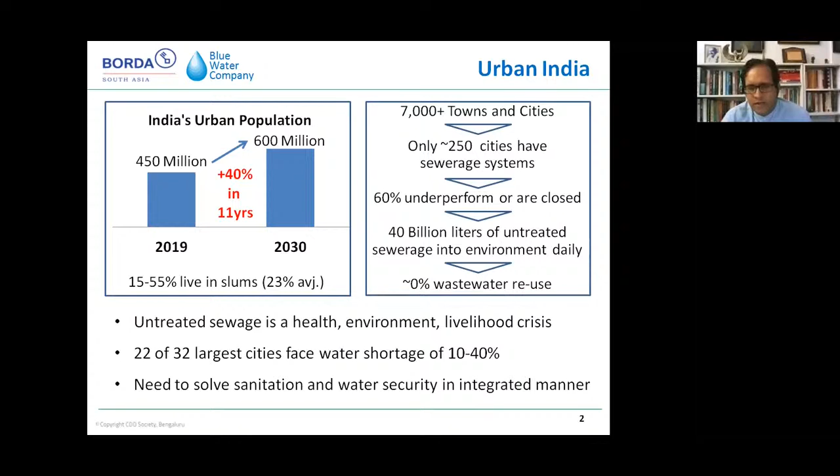So we need to look at sanitation and water in an integrated manner, and that's what we'll try and think about today.

A study done by FSG talked to people living in slums of India. The number one thing people wanted, 44%, was better toilets. This is from 2018-19, not pre-Swachh Bharat, but right in the middle of the Swachh Bharat mission, and still 44% wanted better household toilets. 36% wanted better water supply, 30% wanted drainage systems because flooding is a big problem, and others wanted garbage collection and improved water quality. So of the top 10 things people in slums want, 5 are directly water and sanitation related - that's pretty telling about the scale of the problem.

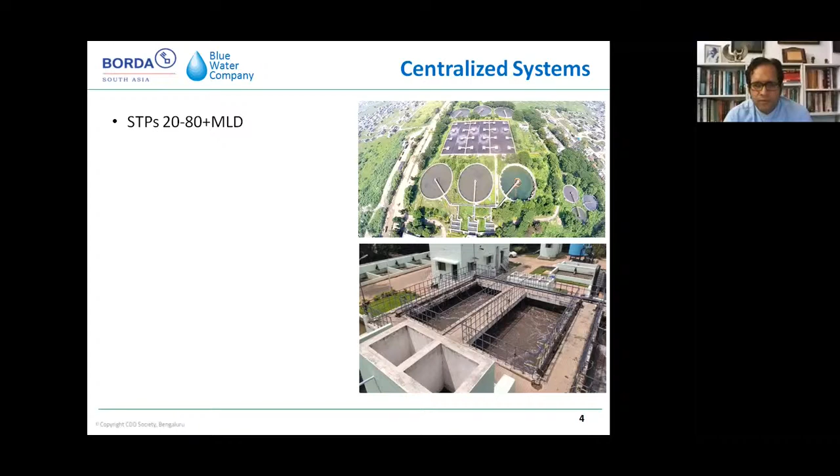Now let's start with centralized systems - the large sewage treatment plants and large sewer networks built in big cities. There are 250 cities in India with partial sewer networks. Typically sewage treatment plants range from 20 million liters a day to 80 million liters a day and more - the biggest under construction is in Nagpur, and Delhi is building one even bigger. The sewer networks that go under the road make up 90% of the total cost.

The sewage treatment plant itself is actually not the biggest cost - digging up roads and laying pipelines is very expensive, funded by the government through AMRUT, JICA, ADB, or other sources. It's expensive, and if it fails, there's a huge cost - both in money wasted, and because a 200 million liter a day plant means at that one point you'll have 200 million liters of sewage coming in with nothing that can be done about it. So you can imagine the large point pollution created in case of failure - the cost of failure is very high.

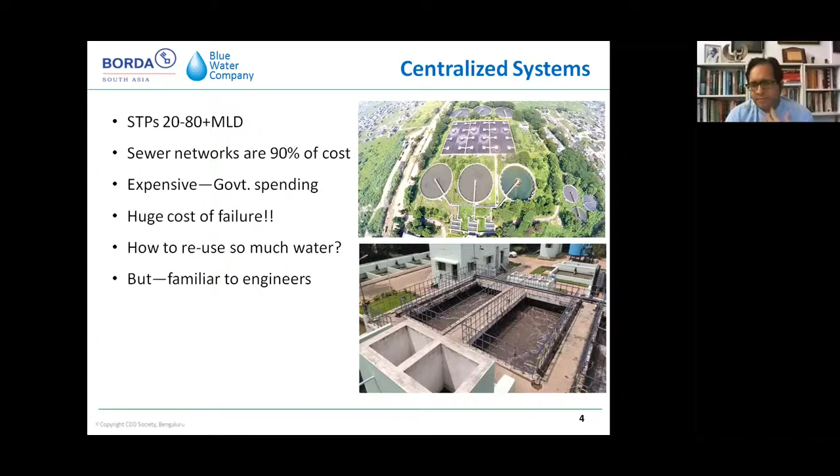How do you reuse so much water? You've taken this water to one place, now you have to pump the treated water to all these different places so it can be reused - so the process of reuse becomes very difficult because this is one big treatment plant in one location. But this is what engineers learn and are familiar with - there's history, so they're comfortable doing this even though there are clear shortcomings. There's a whole ecosystem around it - designers, engineers, quality assurance, operations and maintenance companies - so it's very easy in a sense, even if it's not the best solution at all times.

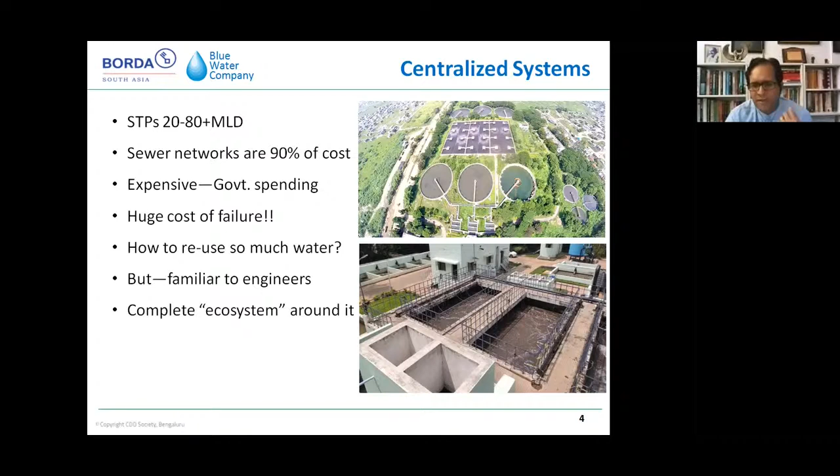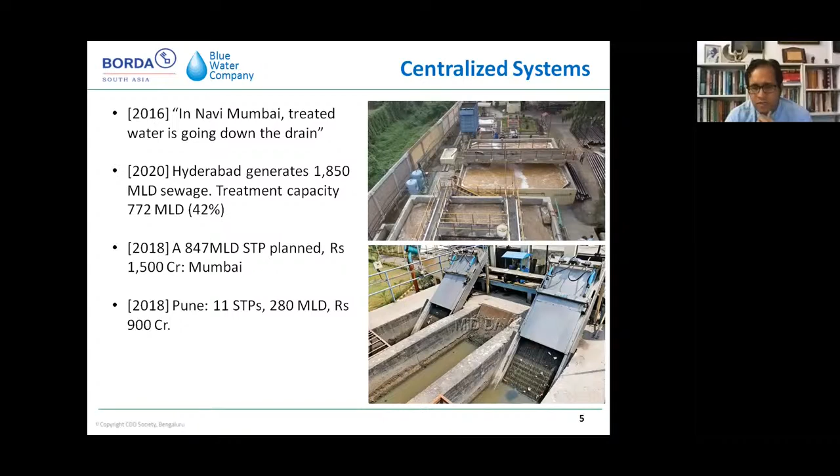A lot of money is being spent on this. For example, in Navi Mumbai, a 2016 newspaper article said treated water is going down the drain - that continues to happen today. Hyderabad generates 1,850 million liters a day of sewage with treatment capacity of only 772 MLD - the remaining 58%, over 1,000 million liters a day, goes into the river and lake untreated. Mumbai has planned an 847 MLD treatment plant costing 1,500 crores - a big project. Pune is building 11 STPs with 280 MLD capacity costing 900 crore rupees with a loan from JICA. And in 2017, Mumbai planned 6 more STPs costing 4,500 crores - another big project.

Just one more thing - for that 847 million liter a day sewage treatment plant in Bombay, new research shows Bombay's west coast of India faces higher and higher risk of massive storms and hurricanes. We've seen what happened in Louisiana, New York, and other parts of the world, and tsunamis that have hit. Imagine what happens if a tsunami hits this STP, which holds almost a billion liters of sewage, sitting right by the seafront.

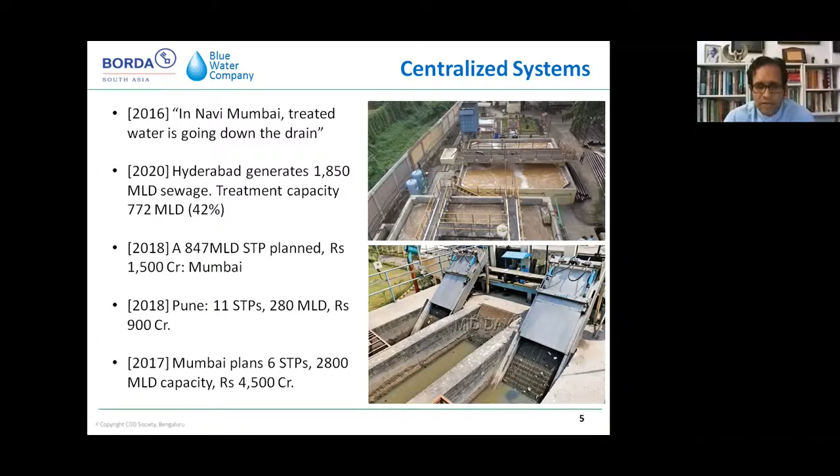You can imagine what kind of crisis you can have, right? So there's also, when I say there's a huge cost of failure, there's also a climate perspective. It will be around for the next 30 to 50 years. Mumbai is still using STPs which were set up almost 80 years ago.

Now let's look at the cost. If you look at centralized sewerage systems, it costs about 12,000 to 25,000 rupees per capita to build. So for a town of 1 lakh people, it will be 250 crores to build the sewer network and the STP. The annual operating cost will run at 2,000 to 4,000 rupees per person.

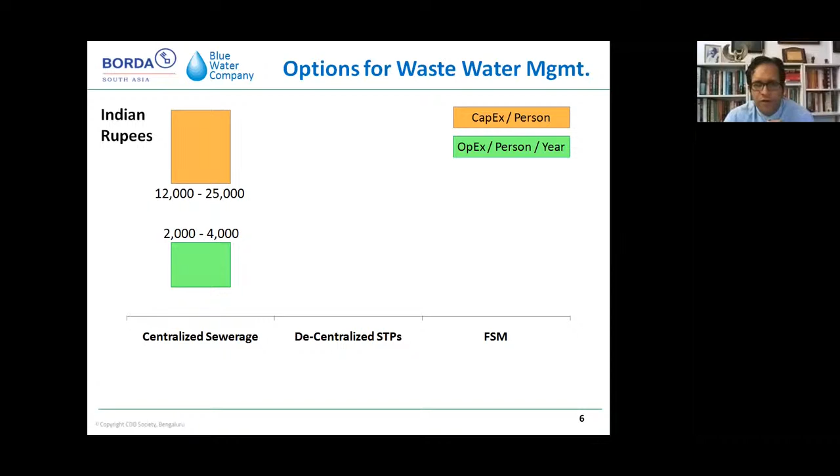Now we'll talk about decentralized systems, but I just want to give you a sense of magnitude. A decentralized system, depending on what technology you use, can cost you between 4,000 to 12,000 rupees per person to set up. So it's a bit cheaper, half the cost. And it costs very low, depending on the technology again, it can be very inexpensive to operate, 1,000 rupees per person per year. And then we talk about fecal sludge management, which is even more decentralized.

And that can be set up for as little as 400 to 1,000 rupees. Your operating cost is 60 to 100 rupees per person per year. Very, very affordable, and therefore it is getting a lot of traction today in India.

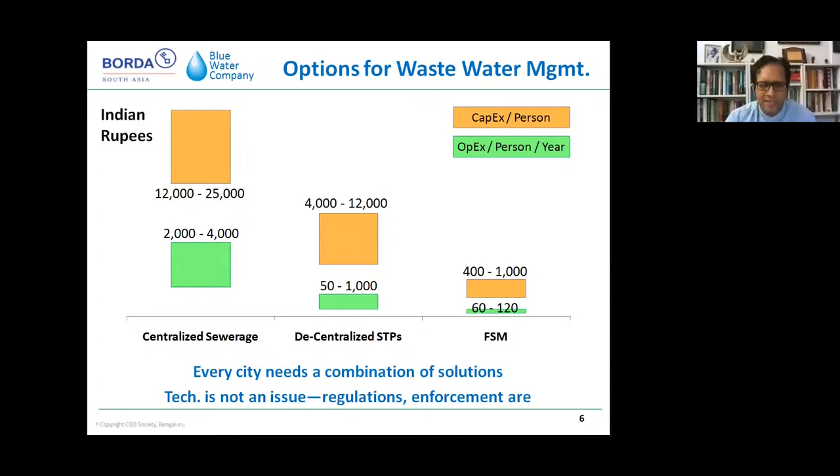Every big city requires a combination of these solutions. Even a small city might require a combination. Technology is not the issue. We have more than enough technology. It really is about planning, regulation, enforcement, etc., which are the problem in India today. There are enough countries we can learn from. There's enough successful studies, cases in India itself for us to replicate.

Decentralized sewage treatment plants - this is where you have a small STP, typically ranging from 40,000 liters to maybe 1 or 2 million liters a day. We're not talking 100 and 500 million liters a day. So they're small scale sewage treatment plants.

They're ideal for bulk users of water. What's a bulk user? Any building that uses a lot - a large apartment building, a large commercial building, educational campus, a hospital, a mall, which uses, let's say, 40-50,000 liters. It's usually not a small household or a building with 10 apartments, right? It will just be very expensive on a per capita basis. But for large buildings and campuses, very, very affordable, a great solution.

There are various different costs and different quality of treatment, and I'll talk to you a little bit about that later. So you've got very simple, durable workhorses. The most common technology - you've got the moving bed reactor, you've got the sequential batch reactor, you've got packaged MBBR system, which come in a container. You just literally put it into the hole or put it into the location, plug in the pipes, and we can install it in 2 days.

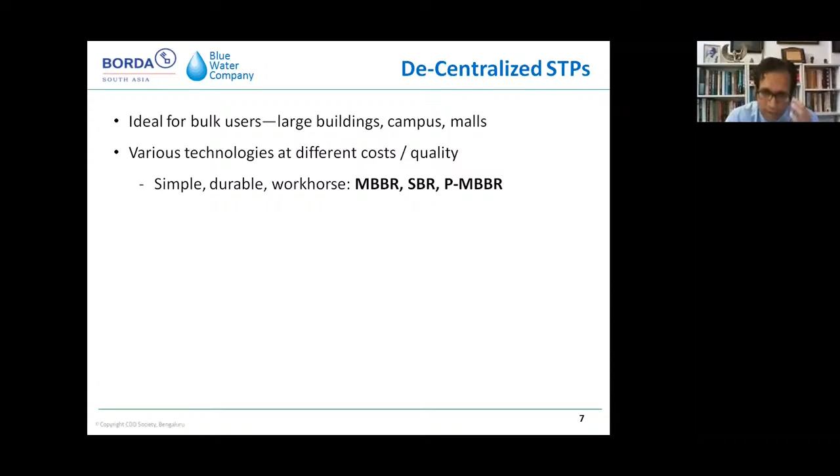You've got biological systems that require almost no electricity. They use nature-based solutions, and some of the options in India are soil biotechnology, DEWATS, Phytorid, etc. And then you've got very high-end systems which will take your sewage and make it into drinking water. This is the MBR technology, the most common. This is Singapore, which takes all its sewage and a lot of it is converted into drinking quality water. Although they don't supply it back for drinking, it's made into drinking quality water. There are 5-star hotels, there are office buildings in India which do this.

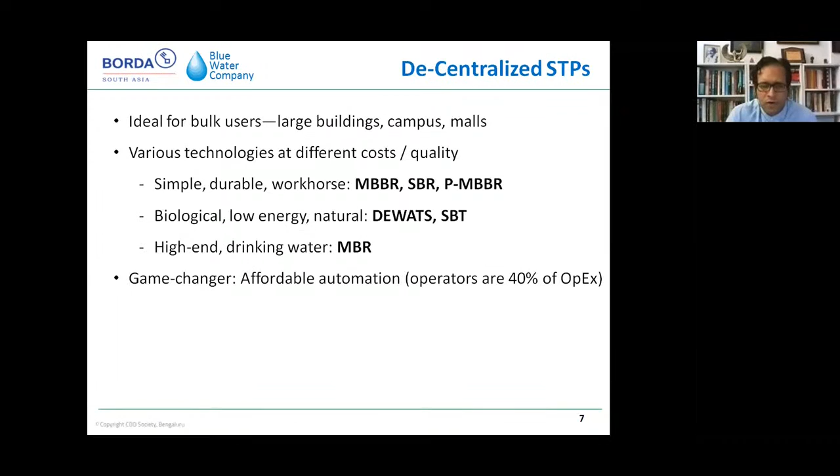So it's a very proven, established, but expensive technology. It takes a lot of energy. Automation in this business - because earlier you needed 24/7 manpower or people operating it, monitoring it, pressing a switch. Now a lot of this can be automated with internet, and therefore you can cut out your operator cost significantly, and the whole system becomes much more affordable than, let's say, even 2-3 years ago or 5 years ago.

Now, if the water within your building or your campus - you need dual piping, which means you have a fresh water tank that comes into, let's say, a bathroom, kitchen, etc. Then you have the pipe from there, which goes to the sewage treatment plant. The water that comes out of the STP is then taken to a separate water storage system, and then is supplied to those taps or those points which can use treated water - so for maybe air conditioning, central air conditioning, landscaping, definitely.

So then you have this dual piping system, and you can reduce your fresh water usage at a building by 40 to 60%. And imagine if you do this at a city scale, you've basically gotten rid of your water shortage problem. There'll be no day zero, there'll be no water stress.

We can address this with land, but we have to remember that 80% of our water in India is used by agriculture. Until agriculture becomes more efficient, it's very hard to make India more water secure. But at least our cities can start by taking care of their own water requirement.

The question that comes up is, what do you do with the excess water? When you're taking, let's say, 100 liters of water, that becomes 95 liters of wastewater. But for reuse purposes, you may need only 40 or 50 liters for flushing, gardening, landscaping. What do you do with that other 45 liters which you have treated? That needs to be either used or released into the environment safely. We'll talk about that.

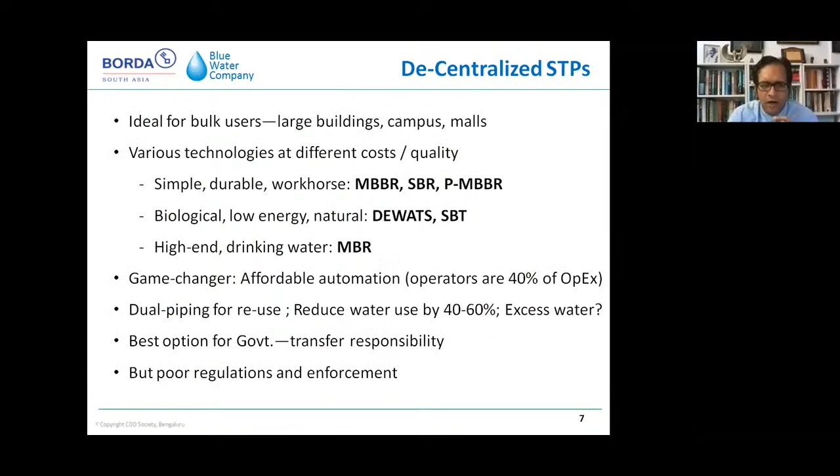This is the best solution for government. They transfer the responsibility to the private sector. It doesn't cost them anything. They only have to do the monitoring, the regulations and enforcement. And yet even that is not happening today because the regulatory enforcement is poor.

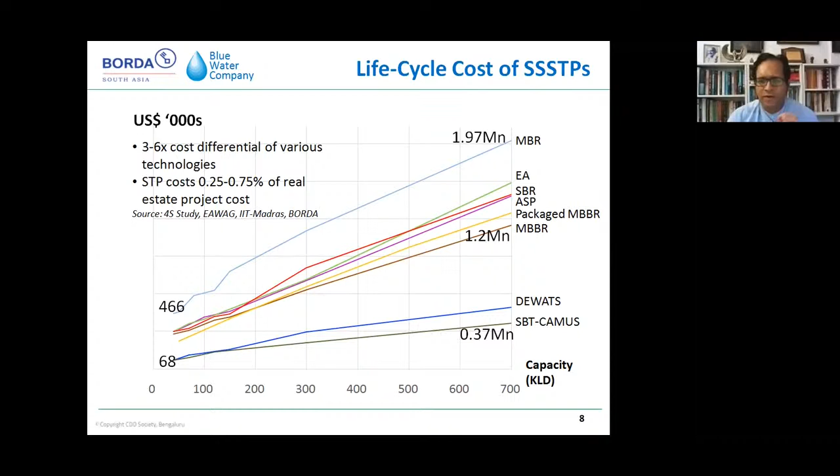Depending on your affordability and situation, the technology should meet the affordability of a particular customer. What we find is that if you look at a real estate project today, the STP cost will be less than 0.5% of the total real estate cost. So you can't even say it's too expensive for us to build STPs - that's not a good reason anymore. And the O&M costs are dropping every year, so it becomes more and more affordable, and really a matter of enforcement and people's responsibility to clean up our cities.

So what are some of the problems and solutions? Some of the discharge norms for small STPs are very strict, making the STP unaffordable because you can only use a very high-end STP. We need discharge norms depending on capacity. If you have a 200 million liter plant, you need it to reach certain standards, because having 200 million liters of even slightly polluted water entering the environment can be disastrous.

But if the same plant is doing 50,000 liters a day, and the water is slightly polluted, in environmental science we say you will get treatment through dilution - it will not be a crisis. Therefore, we should not be spending a lot of money on high-end, small-scale systems. Reuse requires that - if you want to reuse the water for bathing, yes, you need a high-end system. But in most cases we don't do that. We still use fresh water for human contact purposes.

So second is zero liquid discharge. Why can't I sell the treated water? Sell it to construction, to industry, for landscaping, to municipalities, instead of just forcing it to be recharged or released into the drain because of zero liquid discharge norms. Today, builders are often the ones who install low quality STPs because they don't have to pay for them - they install the STP, they get their occupation certificate, they sell the real estate, and they're out.

But then it's the residents who come in, who have to then pay for this poor quality STP because builders wanted to minimize their cost. As a result, you have very high O&M costs, and it becomes a headache for residents, and then at some point they stop using the system.

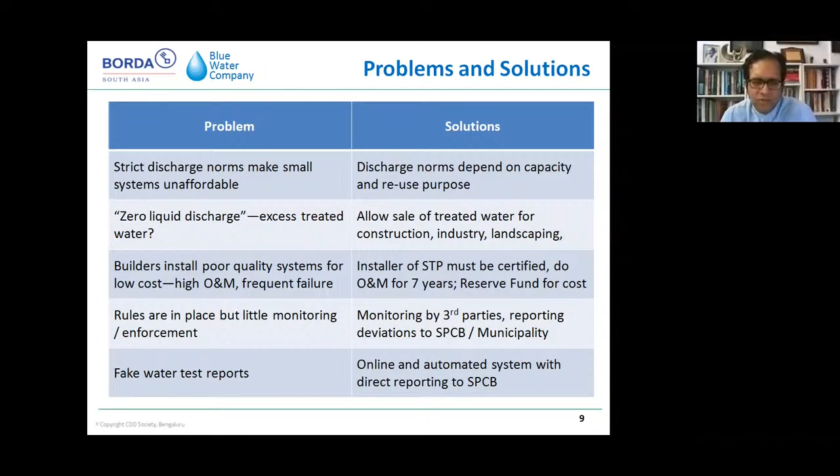Now let's talk about neighborhood level decentralization. Right now what we talked about is in a private complex, and that's easier because it's like in my building, it's common property, common ownership. But what happens when you go into the neighborhood, which is now public space, private - here we need a different approach.

It is still possible to have multiple small scale STPs around town. So in a city like Bombay, instead of doing, let's say, 20 STPs for a big city, you might want to do 300 small STPs. But this has its own complications. You can use different technologies and construction form depending on where the STP is - customize it to neighboring conditions, future expectations of increase in use, environmental danger, flood plains, etc. So you have flexibility to choose different technologies.

But it raises a challenge. Our water departments are used to managing very few centers. They want to run 5 treatment plants for water, 10 treatment plants for STP. We don't have an institutional mechanism to oversee 300 locations or 100 locations. So it requires a new kind of administrative and operational approach to come in for our Jal boards, water nigams, and sewerage boards to be able to manage this kind of decentralized approach.

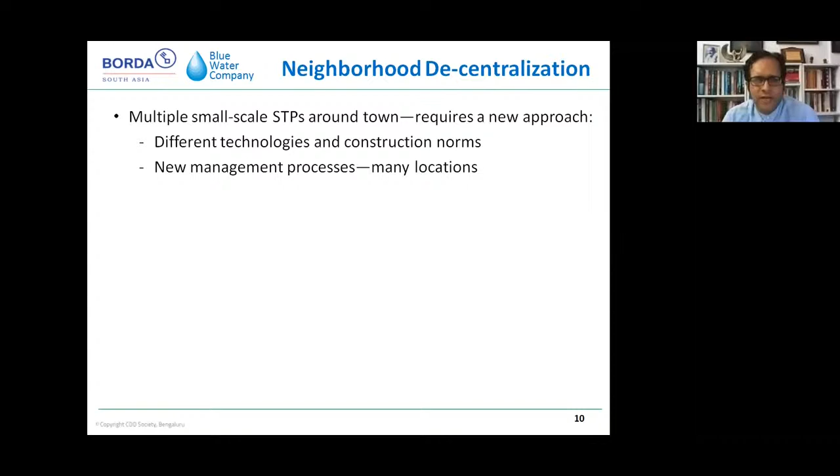Now, if you look at the overall cost of this different sewer system - you've got feeder networks, trunk networks, pumping stations, and STP. All in all, the decentralized approach might actually be similar in cost to your centralized one, because you'll have a higher cost for more small STPs, but you'll save money because the pipes will be smaller. So let's say your overall cost is similar.

Okay, so you say, well, there's no cost difference, I go for this, because there are other advantages. You can build by locality - you don't have to do the whole city in one go. There's money to do it here, or the conditions are suitable, let's do here, next year we'll do that. Today, a centralized system can take 12 years to build, and for 12 years you've dug the roads, people are frustrated, the pipes are there, and when you finally build the network, the pipes you built 12 years ago are breaking, they're cracked, and they're creating problems.

Whereas here you can literally go 2 years, one locality, and just keep building as you go. If some of the norms are changed - currently the norms are designed for big networks - if they're adapted for small networks, then you can actually reduce your costs quite significantly.

And then you can reuse the water locally. Remember, we had that problem - if you have 200 million liters of treated water in one location, how do you pump it back to all the users who might want to use it? Whereas here, if you've got 2 million, 3 million liters there, 5 million liters there, you can use it locally for gardening, for flushing, for public toilets, and so on - groundwater recharge, create water bodies, spaces, etc.

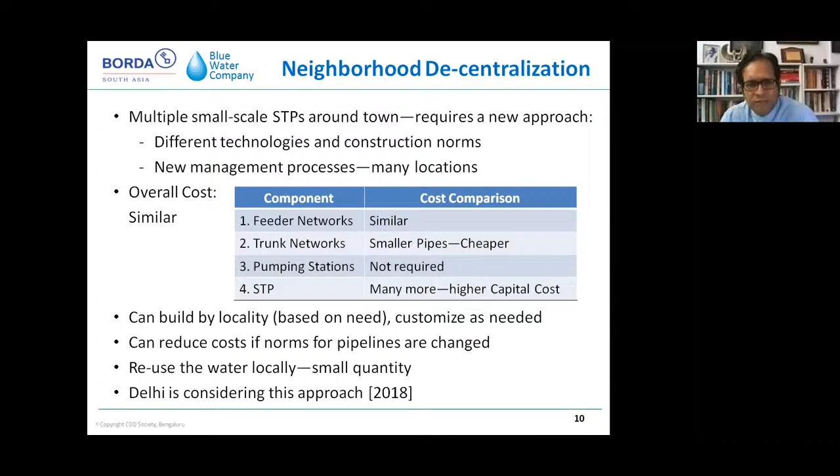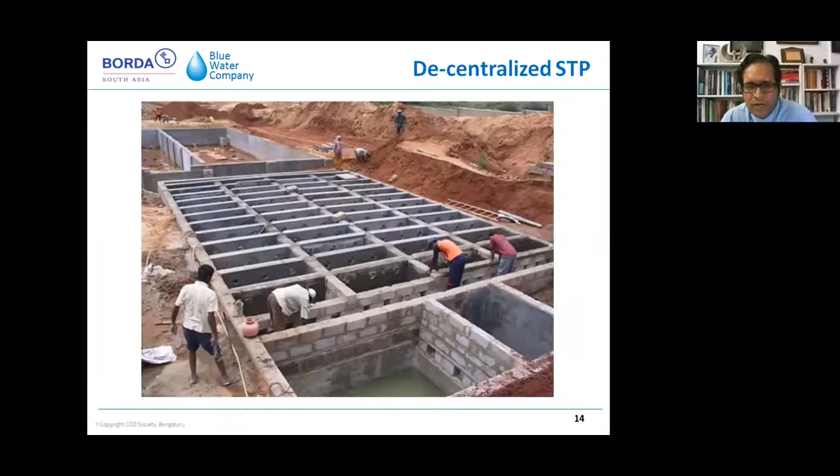This is one system in Bangalore Metro. It's a prefabricated system, and literally the place looked like this almost 4 or 5 days later, a week later, let's say, with the hoardings and all that we put up. But from this to this was literally a week, because it's a prefabricated system.

Now let's talk about a shit flow diagram idea. It basically says, let's look at a location, a city, a country, and ask where is wastewater being generated. You see water closets, these are decentralized toilets connected to tanks, what we call on-site sanitation, not connected to a pipeline. And then you've got open defecation. The water flows to the systems, and it's transported either through pipes or through a truck.

We'll talk about fecal sludge management. It gets treated, and then it gets either reused or disposed into the environment. For India, this was built in 2018 or 17 maybe. When we looked at India in 2025, we said that even now, given that a lot of action is happening on toilets with the Swachh Bharat mission, but not on the treatment side so much, still only 20% of our sewage is going to get treated before being discharged into the environment. It's still going to end up in the domestic environment, agriculture fields, and water bodies without proper treatment. And therefore, building toilets alone is not sanitation. It does not solve our problem.

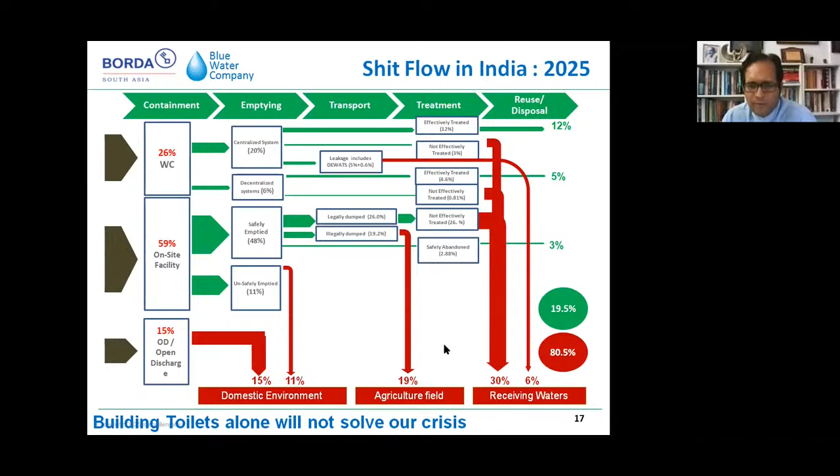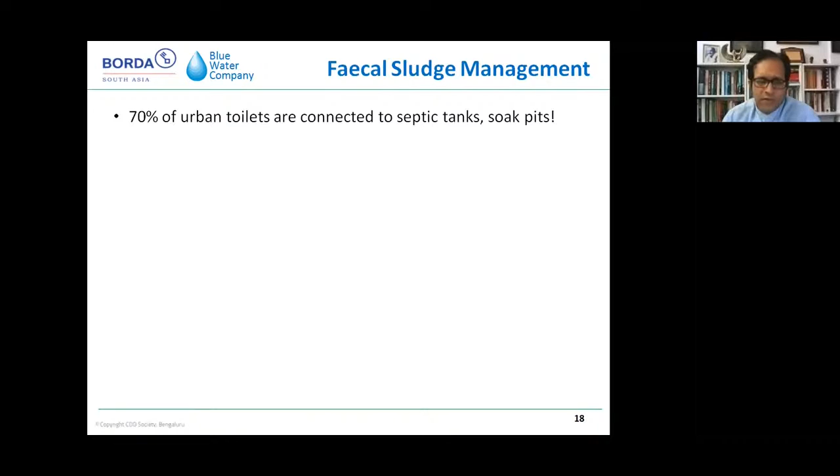Full value chain. So let me come to fecal sludge management. Now, 70% of urban toilets are connected to septic tanks and soak pits, across India. There are very few sewer networks. If these septic tanks and soak pits are poorly constructed, they start leaching pathogens into the ground, including into the groundwater, affecting wells nearby.

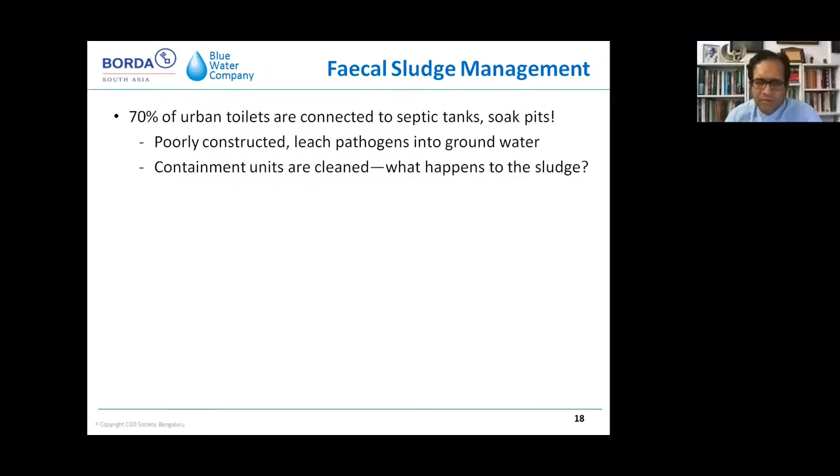Containment units are cleaned by a desludging truck that comes. You can call them, and with the pump they suck out all the sludge, cleaning out your septic tank. And this is typically what happens to it in India. This is actually a photo one of my colleagues took, I think in Karnataka or Tamil Nadu. But this is the situation across India, and this is how wastewater and fecal waste has become the #1 pollutant of water bodies in India today.

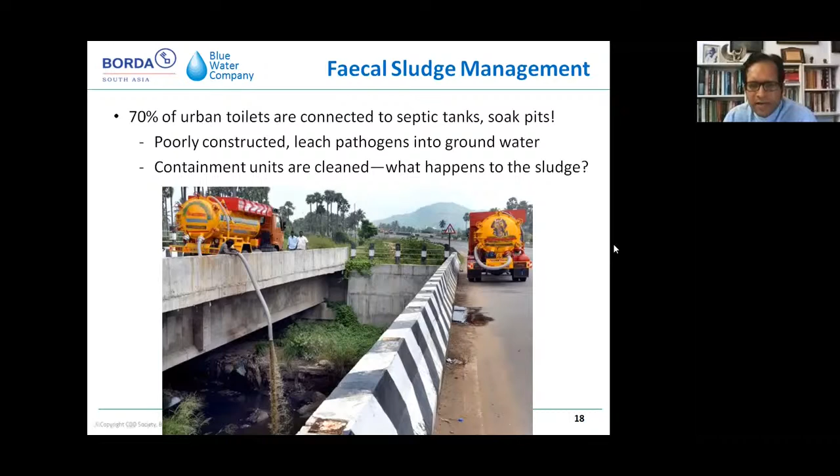So if you look at the whole value chain, you've got toilets, a septic tank, a truck comes and cleans it, takes it ideally to some sort of treatment plant. Once it is treated, then everything can be reused safely. So today we have got more and more toilets being built. Septic tanks are not getting much attention, so they require more attention, and the quality of septic tanks is poor. The service of cleaning septic tanks and soak pits is available almost everywhere, either municipality or private. The service may not be delivered in a very high quality way, but it's available, so it's fine. But treatment is the problem.

There's almost zero treatment capability. This has changed because a lot of new fecal sludge treatment plants have been commissioned. But even today, the amount of fecal sludge that gets treated in India is a few percentage points of the total fecal sludge generated and cleaned out by these trucks, which gets dumped into the environment. Trucks sometimes go directly and discharge this on the land. So reuse happens, but most of the reuse is unsafe from a health perspective.

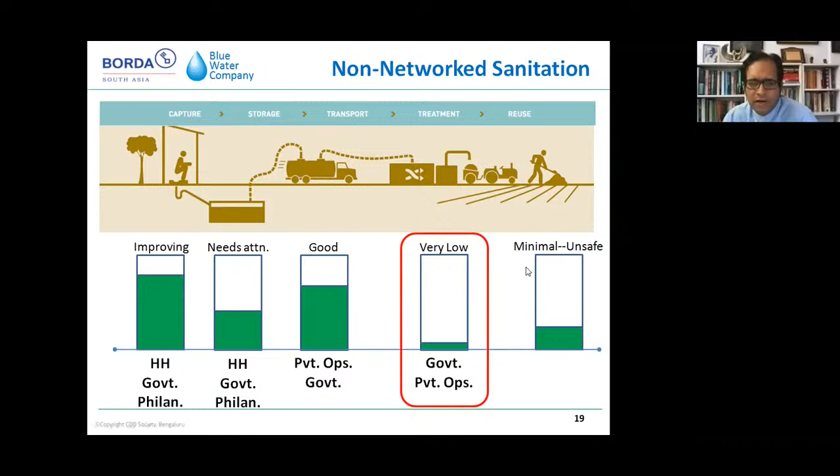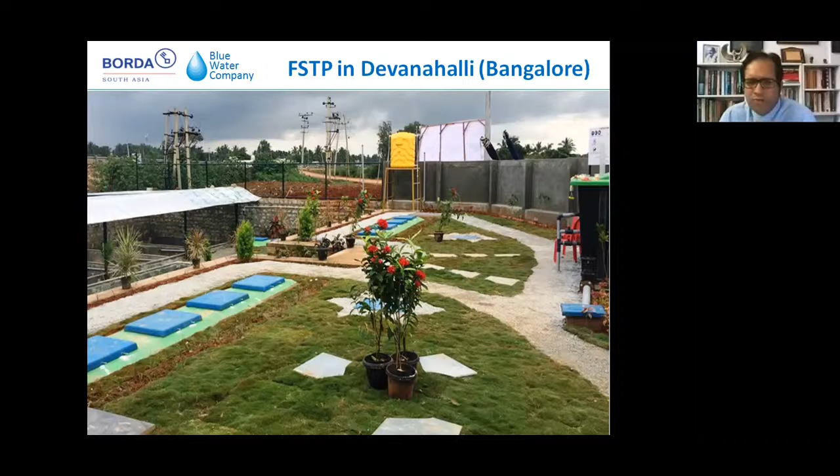It is designed very carefully so there's no opposition from 'not in my backyard' syndrome. City governments have flown in residents to Devanahalli because people will obviously object to a fecal sludge treatment plant in my neighborhood. But when they come and see this, they get the confidence that it can actually be done without smell, without nuisance. This is how the truck discharges - it goes into a wall, and once it goes into that wall, it is never seen again till the end, by which it is sanitized, cleaned, and odorless.

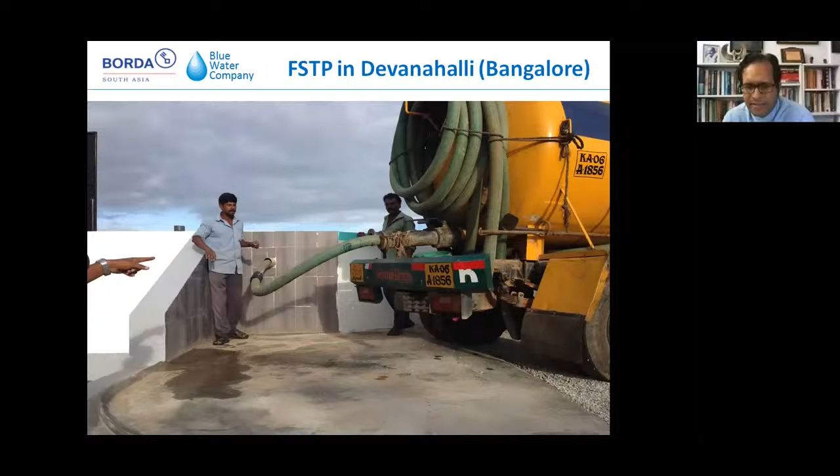So we started a company called the Blue Water Company, and we provide fecal sludge management services in Leh. This was the first public-private partnership contract done in India. It's a turnkey FSM project - build, finance, operate, and then transfer. It's a 5+2 year integrated contract. We also operate the truck that goes and cleans the septic tank, so we have an end-to-end responsibility of managing FSM in Leh.

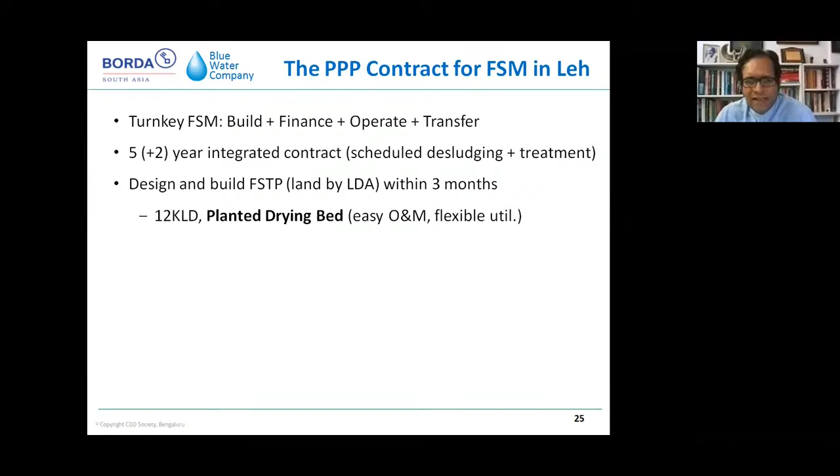It collects user fees from the hotels. Hotels have to have their septic tanks cleaned every year, which is good for the groundwater, so they pay the municipality. Blue Water Company provides the service, and at the end of the month we are paid 90% of that 3,500 rupees - so 3,150 rupees for every septic tank, every hotel, every customer we serve, whether hotel, household, or whoever. Other private players can come in, but they must bring the fecal sludge to the treatment plant and pay us a tipping fee - they can't dump septic tank waste into the open and charge a low fee for it.

It costs the government zero to set this up, and they retain 10% of the revenue even though they don't do any of the service. Therefore it's actually a profitable service for the local government - so it's a win-win for, in a way, everyone.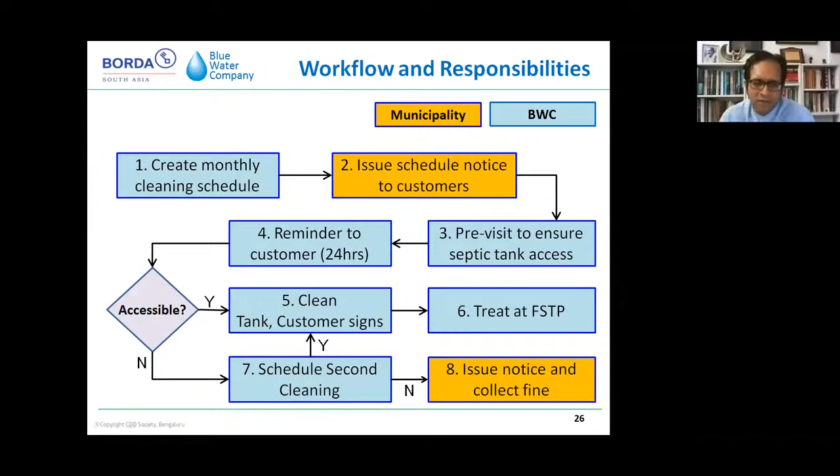The Municipal Committee of Leh earlier used to provide this service. They used to clean 6 to 10 tanks every month. So the question is, what was happening back then?

Either they were under the radar, players coming and dumping the sludge somewhere, nobody knows, or people were not getting that, so they would just clean it out in a very inefficient way with local manual scavenging. So you see a big jump, and therefore water pollution risk goes down significantly because these septic tanks are being cleaned out.

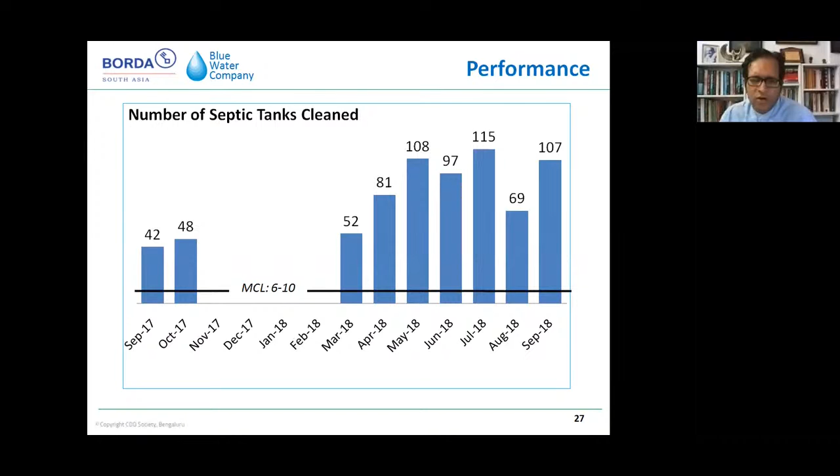They're not leaching as much into the ground. Okay, I'll just talk briefly about public-private partnerships.

For the desludging trucks, there are multiple options. The government can buy the system and tell the private player to operate, or they can tell the private player to buy and operate the trucks, the cleaning part of septic tanks. For the fecal sludge treatment plant, party one can build it, party two can operate it, or one party can build and operate it, which is obviously much better from an accountability perspective.

Or the private party can build it, invest in it, and operate it, kind of like what we have done in Leh, right? We have done this. Then you have the integrated system with the truck and the FSTP, where the government invests in the truck and treatment plant and gives it to a private party to operate. Or the government and private party invest together, and the private party executes and operates.

In our situation, the government did not invest at all. The key reason was that for them to have budgets approved would take time again, and the project size was about 1.2 crores. We were willing to invest that money, and therefore it happened much more quickly.

Now, the payment by the government can be fixed. They can say, okay, you get X, but that's not a great contract. So you want it to be at least activity or output based, which is our structure, where we get paid for every cleaning that we do. Don't do the work, don't get paid.

It will be a hybrid. Sometimes you want to have a minimum guarantee, so that at least certain infrastructure can be maintained even if business is low for any reason, or there's a disruption. At least salaries and so on get paid, which is attractive to a private party.